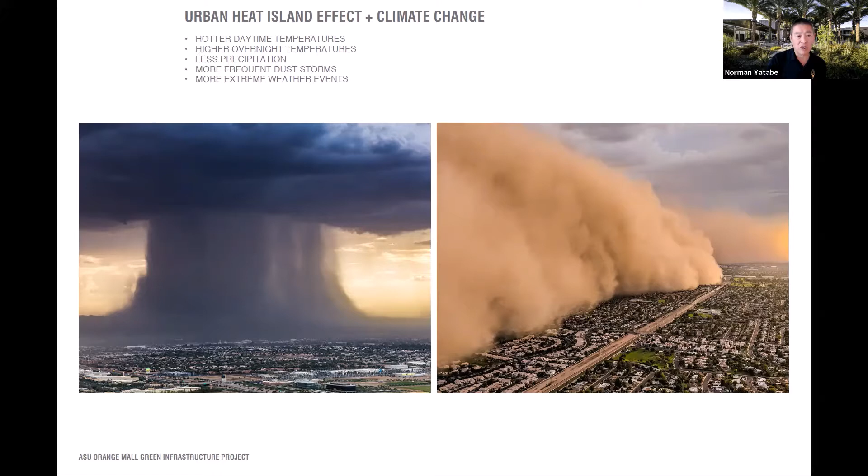So to address the negative impacts of climate change, ASU has committed to leading the world by example and has established a series of sustainability goals, which in essence permeate all aspects of university life. To meet these goals, our approach includes advancing sustainable technology and research, converging the university's mission with its operations, raising awareness of climate change and resource depletion, and learning from the practice of implementation. And two examples of that are our Campus Harvest program, which addresses our food connection goal.

There's two parts to it. One is the date collections and citrus collections from our on-campus palms and citrus trees.

Sorry, this seems to be a little slow here.

In terms of staff and faculty involvement, we extend participation and interaction by staff, faculty, and students in all aspects. And what you're seeing here is just our grounds operations and students and staff participating in zero waste events and some of the food harvest collection.

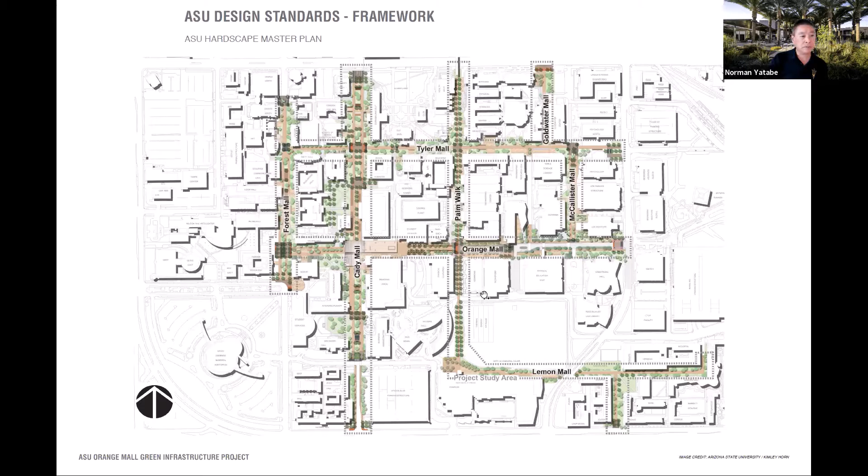So in 2016, the Student Pavilion project was created to house all student government and student group activities into one building in the heart of campus. The goal here was to achieve a LEED Platinum and make it also ASU's first net zero energy building. We also saw this as an opportunity to address the area in front of Student Pavilion. So this is just context, middle of campus and Student Pavilion and Orange Mall. And use Orange Mall as the first implementation of our hardscape master plan.

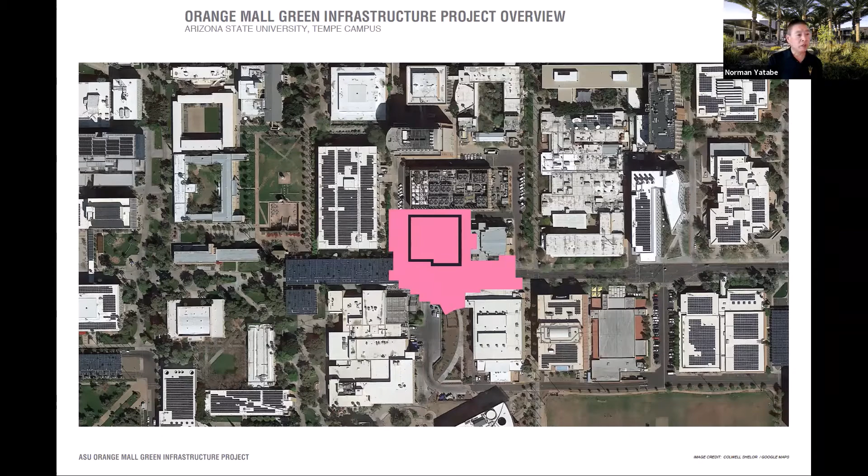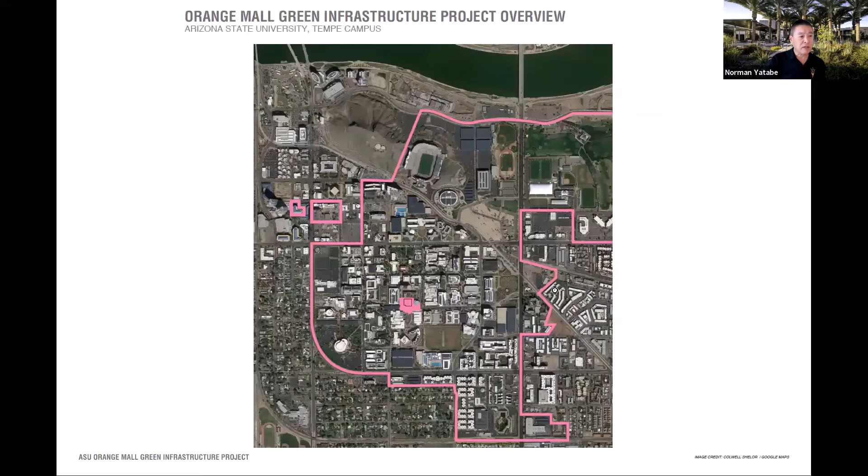So, sorry, I got to go back here. So we essentially had 2 projects that were working in one project area with 2 different consulting groups. The Student Pavilion was led by Weddle Gilmore as the prime architect, and Orange Mall was being led by Allison's group as the prime landscape architect. And I think with that, I'm going to pass control over to Allison to talk about the project specifically.

All right, thanks, Norman. All right, so the stakeholder engagement process was really well attended by the students, and the desires for the building and the corresponding outdoor spaces were integral to the development of the larger section of Orange Mall. And there we go. And over half of the top 20 desires included goals for the outdoor spaces or about the creation of indoor outdoor spaces that jointly met the goals.

One of the largest challenges of this project was the location, because the site is in the middle of the heart of the campus, next to the library, the student union, lecture halls. And so around 12,000 students and faculty walk through the site each day. And then during the hotter times of the month, the pavement can be over 130 degrees Fahrenheit. It's really hot. And there wasn't a lot of shade.

And then as the campus is densifying, a lot of the outdoor spaces are being taken up with larger footprints for the building and taller buildings. And then even during just mild flooding or storm events, the buildings around this area would experience flooding. So it's just interesting that just a couple of storm events each year, the few times that it rains, it really pours, but those couple storms make up that 7.7 inches that Norman was talking about.

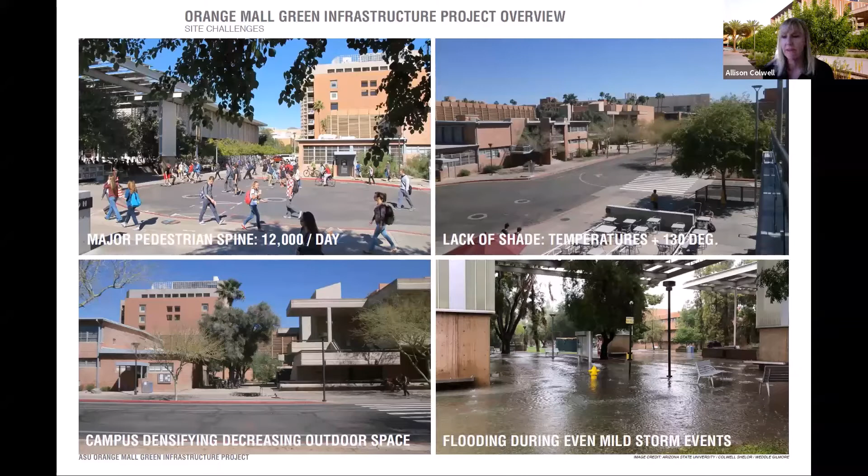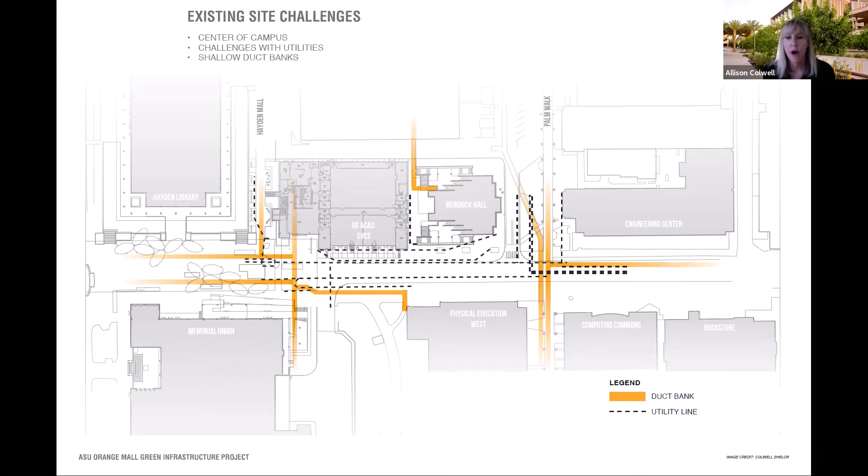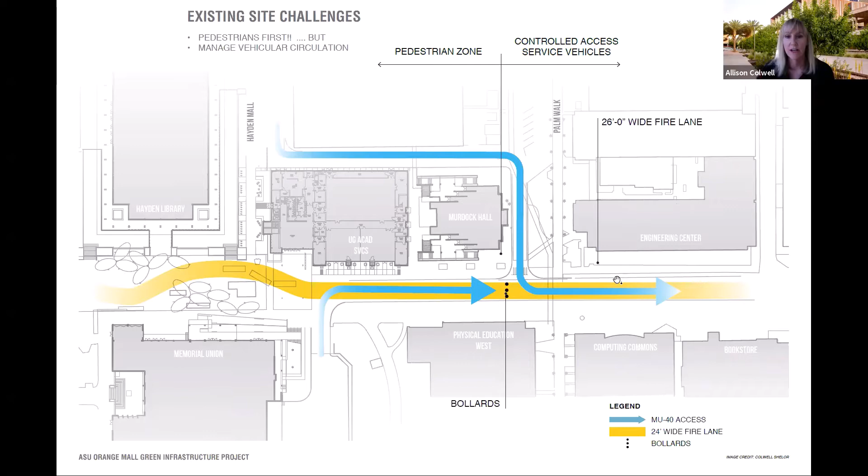So there were other challenges to the site. There were many utilities and really shallow duct banks. And we found out very soon that we were going to have challenges getting the water across the site with these shallow utilities. The design priority was pedestrians first. However, we needed to accommodate a 24-foot fire lane right through the middle of the site, as well as a loading dock that needed to access through the site for large trucks. And then the central plant is in this area here, and the trucks needed to kind of get around the building from the central plant.

So taking all of that into consideration, plus the student feedback, the project goals of the landscape were to first prevent flooding in adjacent buildings during our monsoon season, mitigate the microclimate to maximize comfort and use, provide social space to reduce student stress, create flexible event space as a social amenity, create a perceivable educational living laboratory, support ASU's position on global sustainability, and achieve sustainable site certification.

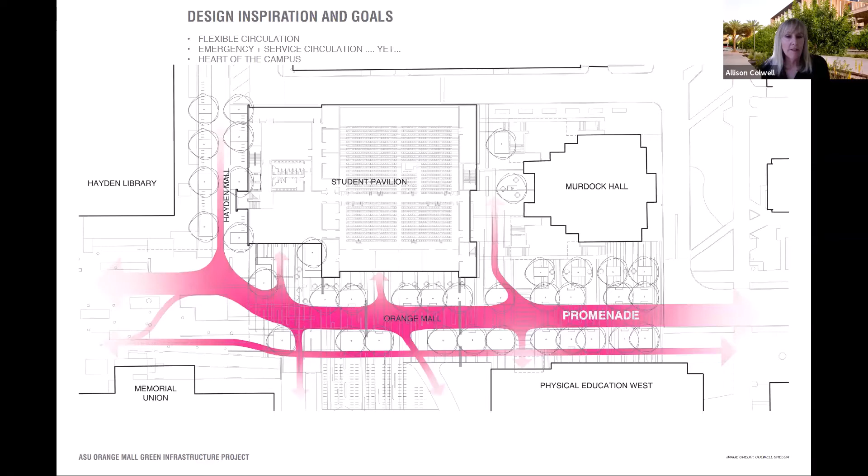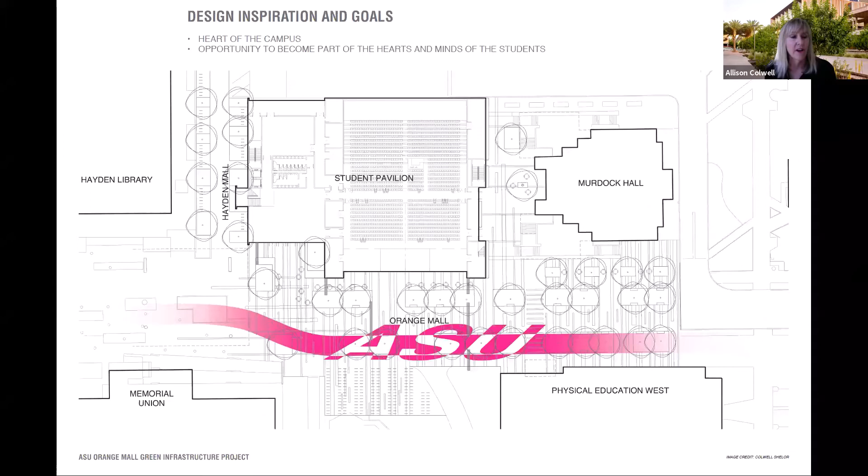So by creating a dominant promenade through the site connecting to all the other highly used buildings, we saw an opportunity to create a space that transforms the heart of the campus into a green heart of the brand of ASU with living laboratories at front and center. The renovation transforms the asphalt paved vehicular roadway into a shady pedestrian mall. Just showing you a couple of the features, this is a covered pre-function space for the student pavilion right here.

And then moving to the east, this is the Palm Court with perfect dappled shade, and it allows for both programmed and non-programmed activities such as student projects, concerts, protests. And then down here at the south is the rain garden, which has seating for a little bit more quiet off the busy thoroughfare for respite. And then the bioswales to the east flank the promenade.

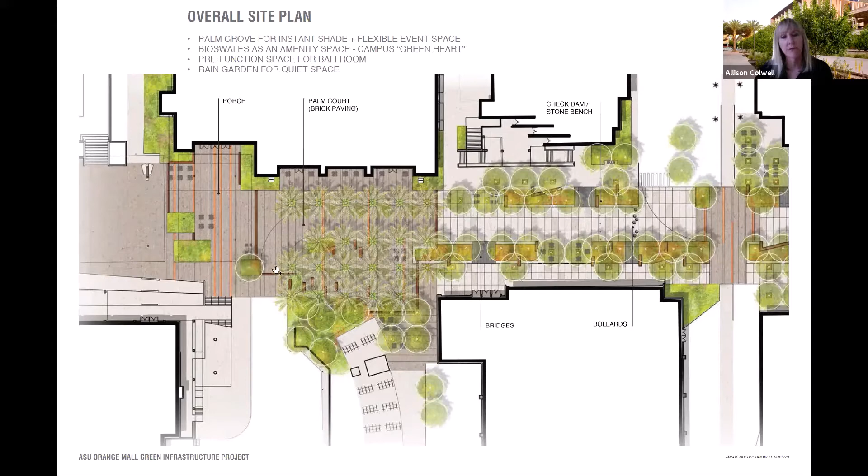They have bridges for access across the site, and then steps down into the bioswales for encouraging access into the gardens. And then the benches act as check dams throughout the site to kind of slow the movement of water. And then one last thing was the roof rainwater is brought down into the scuppers in these two locations, and then they traverse the site via these visible runnels down into the rain garden.

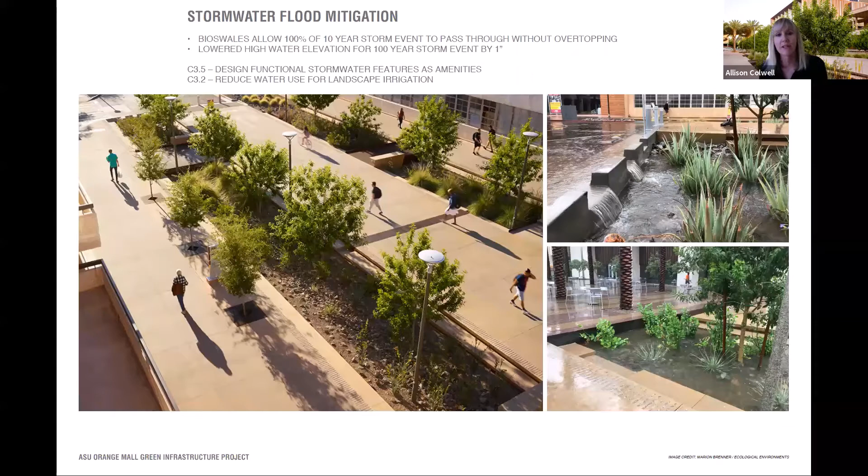And here is an aerial view of the eastern portion of Orange Mall, pretty quickly after it was constructed, as well as a view of it in action. And the same thing here. And the swales allow 100% of a 10-year storm event to pass through without overtopping, and have lowered the high water elevation for a 100-year storm event by 1 inch. So they're working really well.

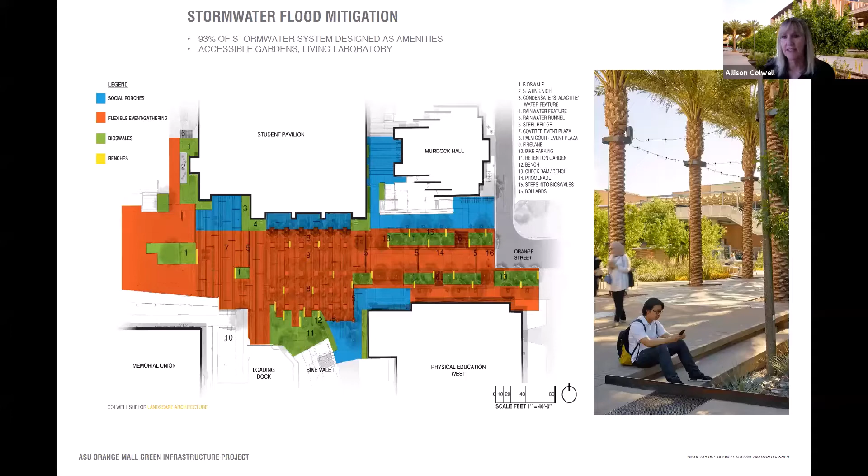The bioswales are designed as an amenity so that the students can access the space both in classes and recreationally. And 93% of the stormwater system was designed as an amenity. This diagram shows the water conveyance system. Basically, the north bioswales fill up quickly, and then overflow comes to the south bioswale, and then it comes down to this low point, which is the rain garden. And then the west side of the site has its own series, and anything that is not used in the landscape at this point will overflow to the retention and sports field south project site.

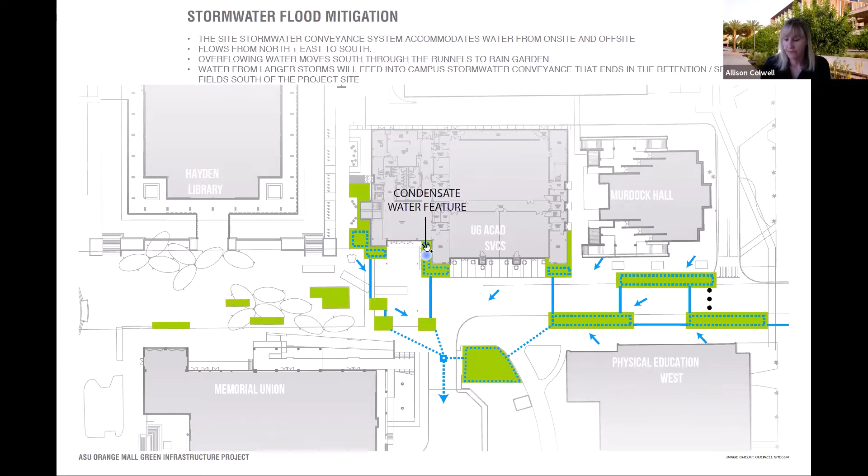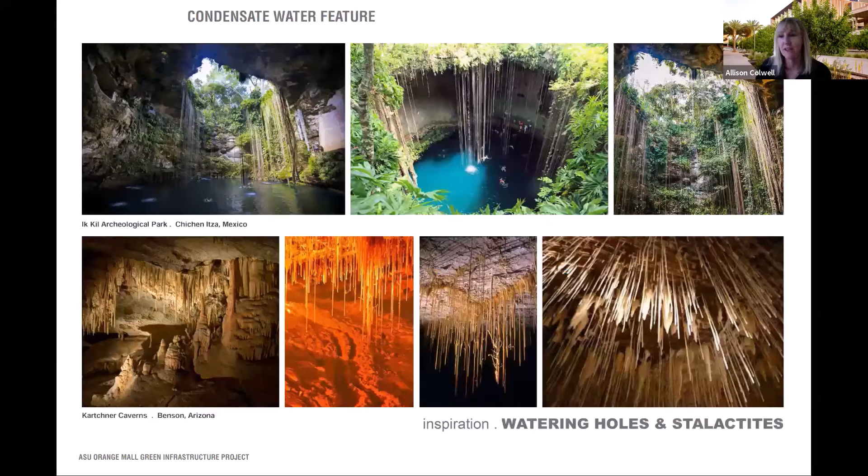And then there is a condensate water feature that is located at the front door. I'll show you a little bit about that. So the design of the water feature took inspiration from the living caves in Arizona and the resultant stalactites that drip and grow from the rich minerals as water travels through the soils and rock above. Kartchner Caverns in southern Arizona is one such place, and definitely worth visiting if you're ever in the area. It's really fantastic. Here are some of the materials that we used.

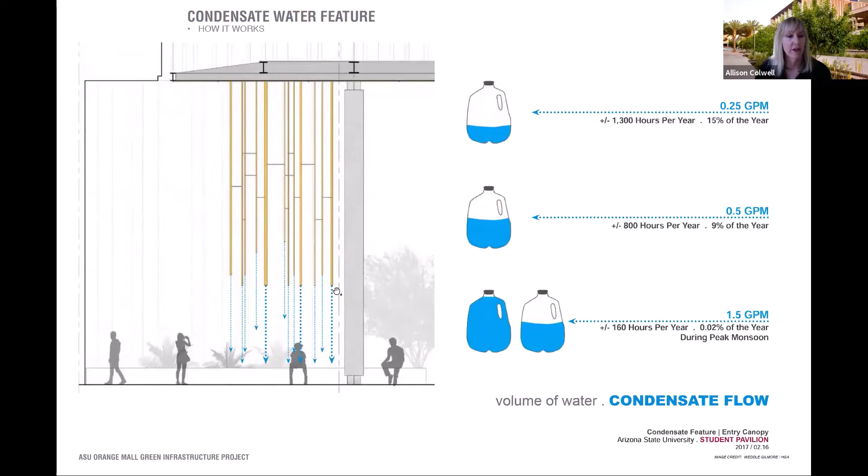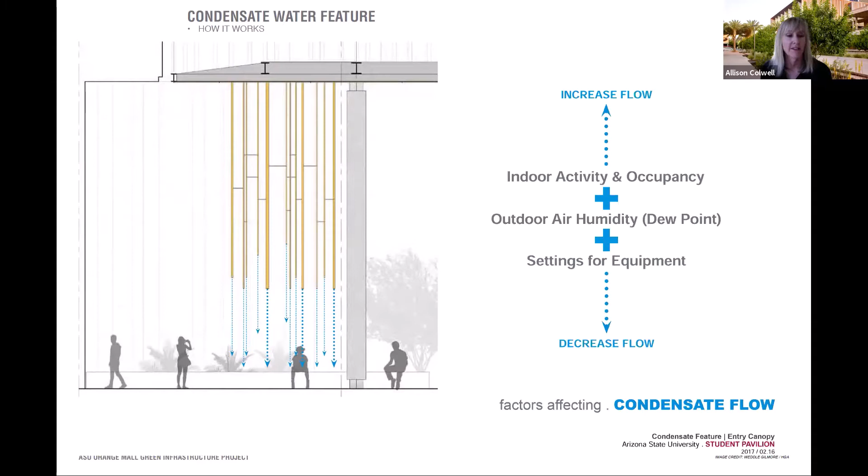So the Palm Grove provides the much needed flexible event space for both day and night use and easily accommodates a high pedestrian volume. Another key goal was to provide shade on day one. In fact, shade is the most important microclimate element necessary to facilitate social connection. And it's extremely difficult to do in the desert, as our native trees grow very slowly and can take more than 15 years to create a decent shade canopy. Additionally, the desert trees have very small leaves and really low evapotranspiration rates.

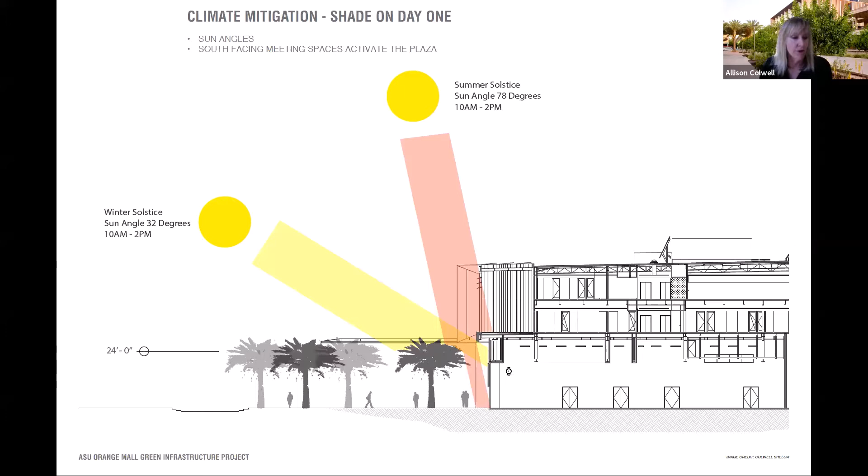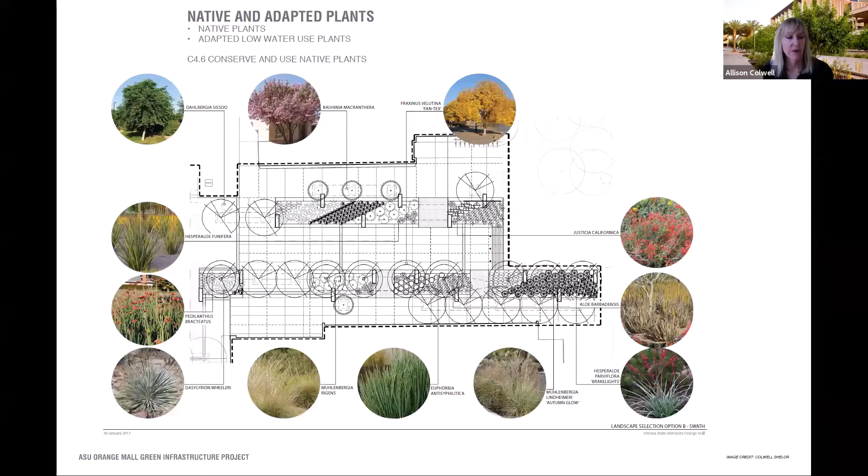Thank you, Allison. Let's see. It's not moving forward.

Since SITES was still new and unfamiliar to the team, I was brought on as a SITES project administrator because of my background as a LEED consultant. Understanding LEED made for a natural transition to learning SITES because the two rating systems are laid out in a similar fashion and are somewhat similar in their submission processes. Also, Sustainable Sites Initiative and USGBC have done a great job of aligning some of the credits and making SITES and LEED synergies easy to implement.

The Student Pavilion was registered under LEED version 2009 and was pursuing, and eventually earned, Platinum certification. This meant that a lot of the credits that shared synergies were being pursued by the LEED project, and we only needed to refer to the LEED project to earn those SITES credits.

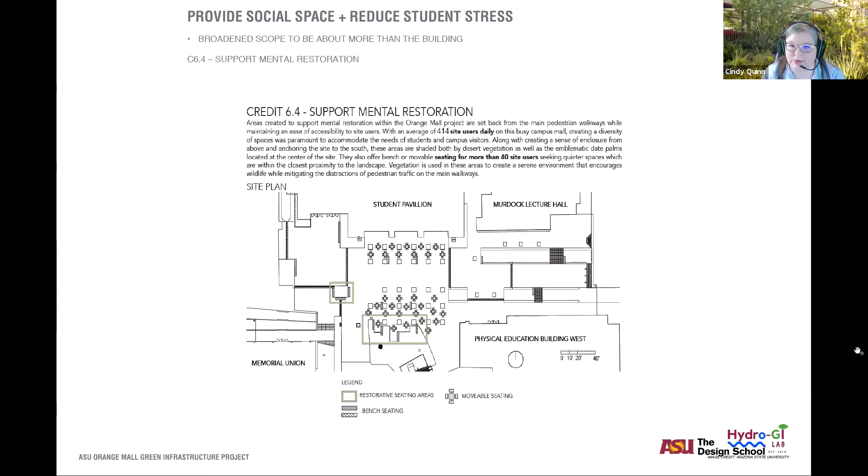One challenge we had in the SITES process was that the LEED project and the SITES project had separate design teams. I wasn't involved in the LEED certification of the Student Pavilion, which presented a challenge in maintaining our SITES scorecard throughout the process. We were at the mercy of the LEED project a little bit.

We couldn't really be certain that we would have those 40 points until the Student Pavilion was certified. On the other side, it could have simplified the Student Pavilion's LEED documentation process had they used the SITES to LEED synergies. So we would recommend having unified design teams for the building and the site.

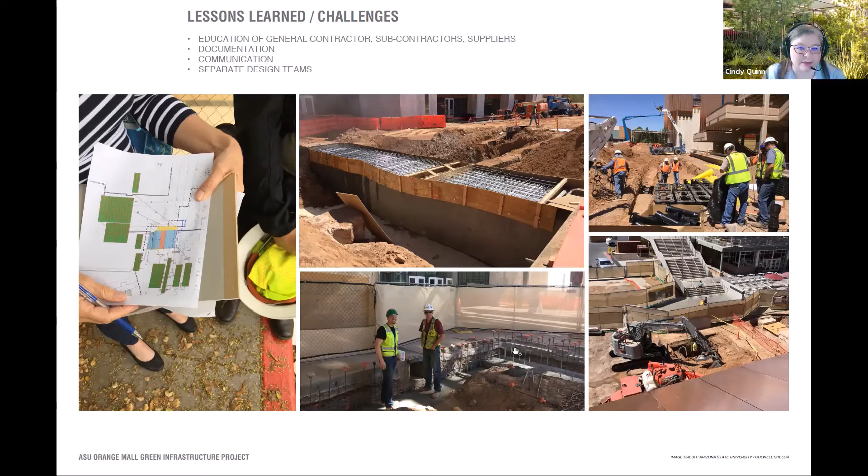One lesson we learned is that it's really important to educate your contractors, subcontractors, and suppliers in sustainable practice and in the documentation needed for the certification process. Even with pre-construction meetings and site check-in meetings with the contractor, this was very difficult.

The trades that have been influenced by LEED were the most successful, but still we pretty much just got that LEED data sheet showing recycled content.

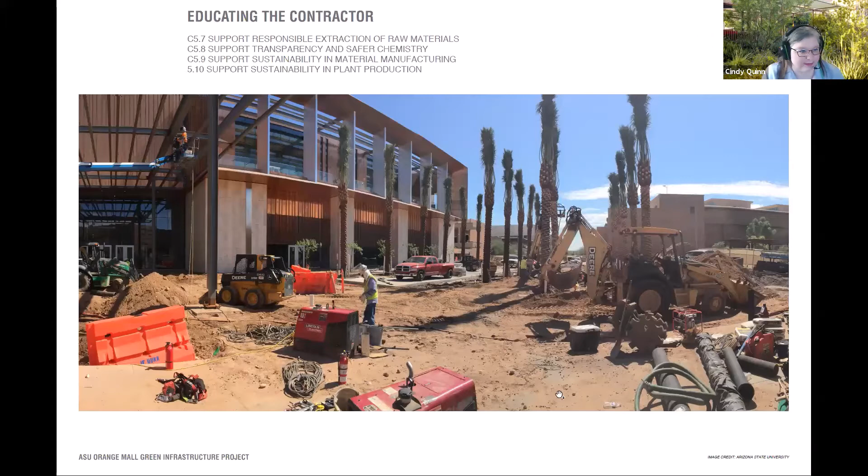As a long-term goal for ASU, as we continue to work with these repeat vendors, our hope is that those vendors will begin to recognize the importance of sustainability and use the SITES process to take a look at their own practices and implement sustainable actions. We also hope that the techniques they learned through this SITES process can be carried forward to their own future projects.

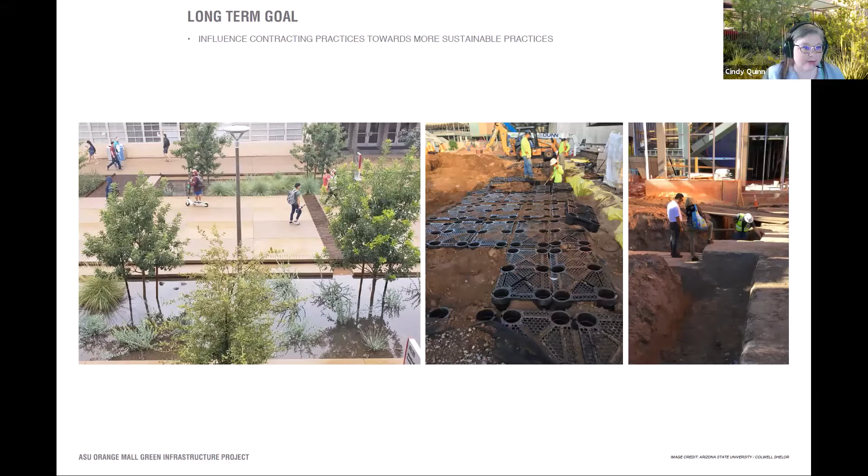One example of that is these Silva Cells. The design team specified the Silva Cell system to allow healthy tree growth under paved surfaces. At first, the contractor had no prior knowledge of the system and it wasn't intuitive to them. They were used to the traditional way of placing trees in over-compacted soils and the occasional use of structural soil in tree pits. But after the product arrived and they had their training, they were really surprised at how easy it was to install.

In addition to spreading the message of sustainability to our contractor and subs, this project was a great opportunity to spread the message to the ASU community and the public. Using the framework of C9.1: Promote Sustainability Awareness and Education, we had several opportunities.

First, the ASU website has a virtual tour where people can use the interactive map and visit all of ASU's sustainability points of pride, including the Orange Mall project.

Second, in-person tour guides will take prospective students through the Orange Mall and talk about its sustainable features. And finally, seen here are a few examples of visual graphics around the site that educate people about another feature, our water monitoring stations. Chingwen will talk about that.

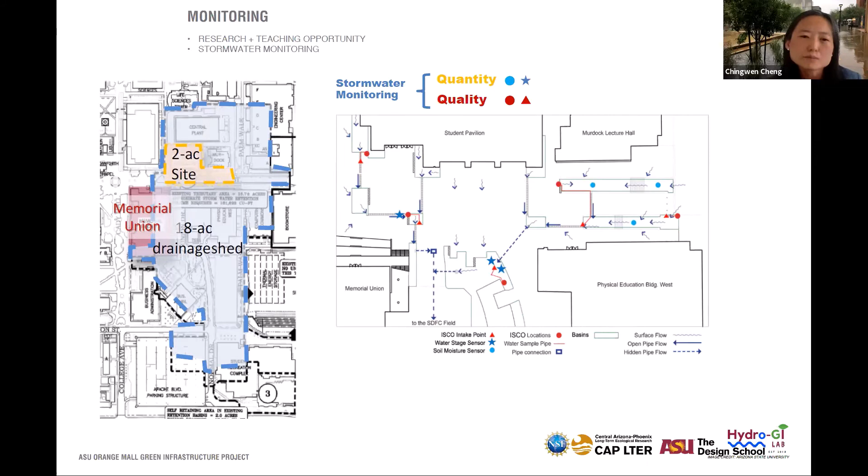That's a blue star. And for water quality, we have automated water sampling equipment that was stored in receptacle containers, meeting Arizona State University's design standards, shown on the red dots. The triangle red dots are the input and output points where we collect samples to compare.

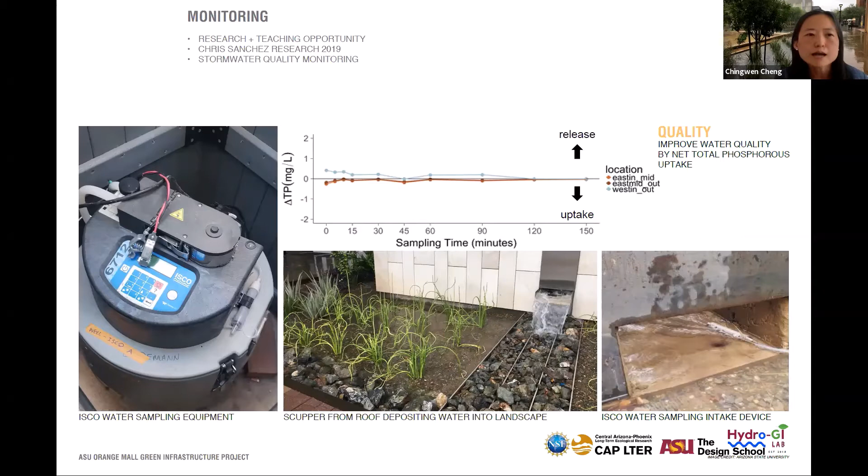We were actually able to retain more than a 10-year storm event, up to a 25-year storm event, for this design. So I think it is great evidence to illustrate how the bioswales, plants, and soil have effects to mitigate stormwater runoff.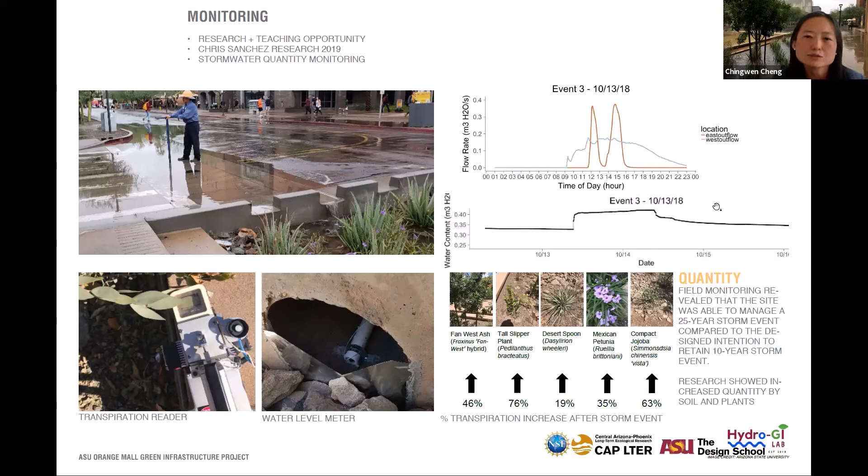With Landscape Architecture Foundation case study support, we were able to do additional monitoring this past summer on thermal comfort, using mean radiant temperature measurement to sense how the thermal comfort would feel at ground level. We simulated before and after construction, and showed evidence that it can decrease up to 24 degrees Fahrenheit between the hard asphalt and under the shade of the trees. Those are another piece of evidence showing how we can mitigate urban heat island effect through our landscape design.

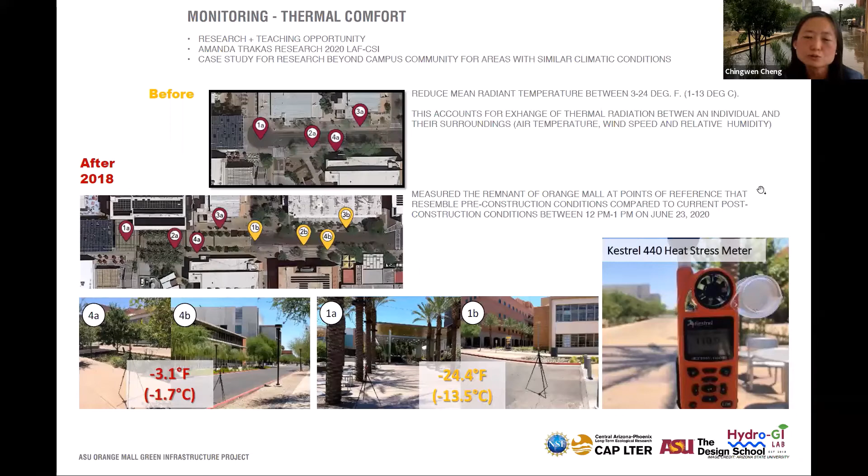For social and health benefits, we integrate with classes, teaching, and research opportunities to have students do observations, and we have graduate students analyze the data to show the locations and durations where and when students spend their time on the site. We categorize this based on mental restoration and social interaction, according to site criteria.

So again, we are able to show evidence that students do take advantage of these beautifully designed landscapes, and that can help improve their stress removal and increase social interactions.

As Cindy mentioned, this site provided multiple opportunities for education and outreach. We were able to engage graduate and undergrad students to do research as part of their thesis, and provide classes and tools, engaging more than 500 students so far to tour and understand the site. We were also able to show outside communities, such as Maricopa County Flood Control District and a charter school in Phoenix, the Pioneer Academy, and both of them showed interest in getting site certification on their campus.

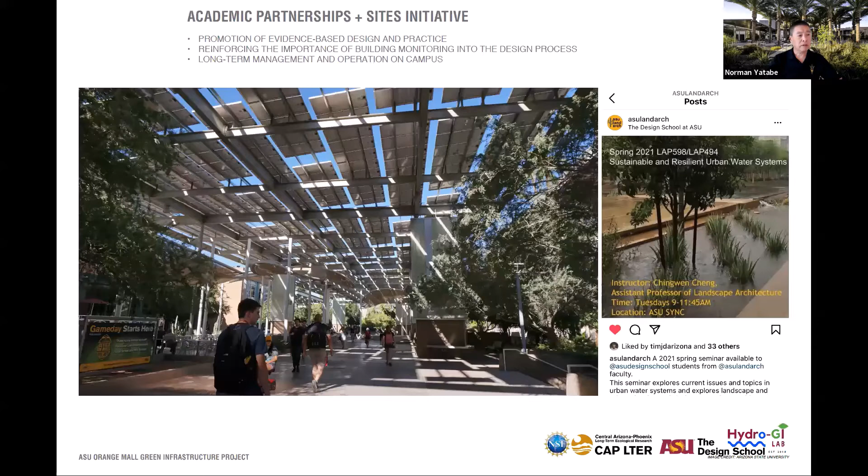We are all extremely happy with how this project has turned out, and we are very honored to have achieved gold level certification. For ASU, this has been a great experience in terms of involving different groups within ASU, from our academic side, our operations side, and our planning, design, and implementation side as well. Moving forward, ASU has committed to incorporating sustainable sites certification as part of future projects when it makes sense and when we have the right scale and composition of project.

To that end, we have a second sustainable sites project in the works. This is over at our Nelson Fine Arts and Music School area, and this is another project that we are really looking forward to getting site certified through GBCI. With that, I just wanted to end off by saying we want to thank Danielle and her team at GBCI very much for their support and assistance in our efforts here. And with that, I would like to turn it back over to Danielle.